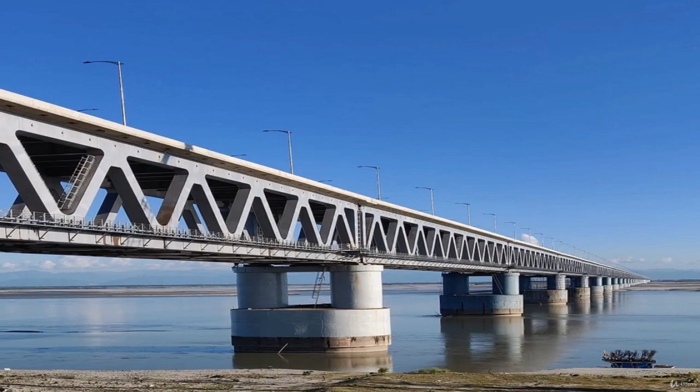In this episode, we'll take a look over the general information and the engineering aspects of Bogibeel Bridge, which is India's longest rail-cum-road bridge. So let's get started.

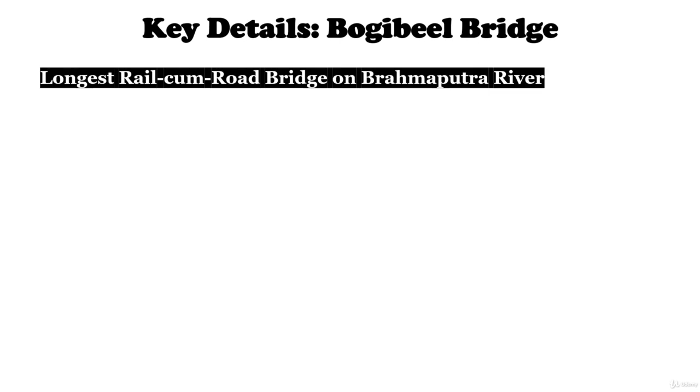Bogibeel Bridge is a combined road and rail bridge over the Brahmaputra River in the northeastern Indian state of Assam. This bridge is 4.98 km long, which reduces the travel distance for the people of Arunachal Pradesh and Assam. Before this bridge came into reality, people used to travel by ferry to cross the Brahmaputra River, and that transportation is slow and difficult too.

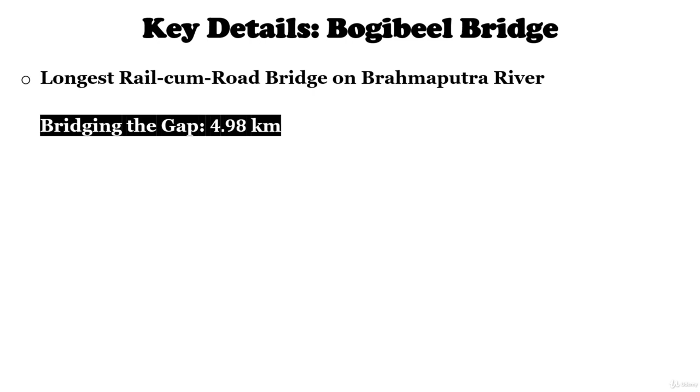Bogibeel Bridge is the fifth longest bridge in India after Bhupen Hazarika Setu, Dibang River Bridge, Mahatma Gandhi Setu, and Bandra Sea Link. But it is the longest rail-cum-road bridge in India and the second longest rail-cum-road bridge in Asia.

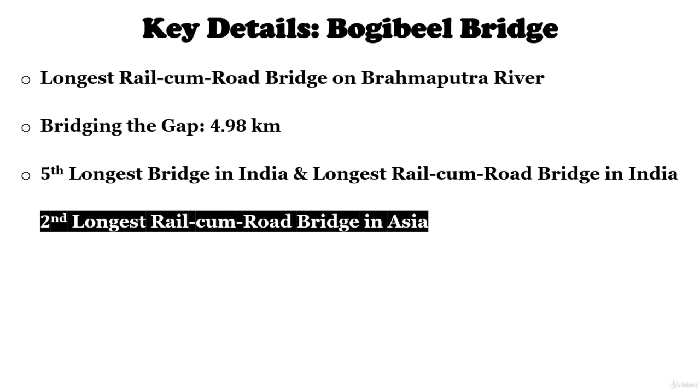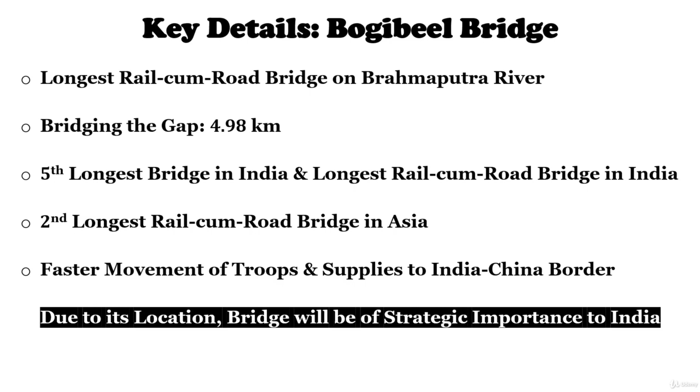This Bogibeel Bridge has strategic importance, which facilitates faster movement of troops to Arunachal Pradesh, the country's easternmost Indian state that shares a border with neighboring country China. The bridge gives easy and direct access to Upper Assam from the rest of the country through Brahmaputra's north bank, so due to its location, the bridge has a strategic importance to India.

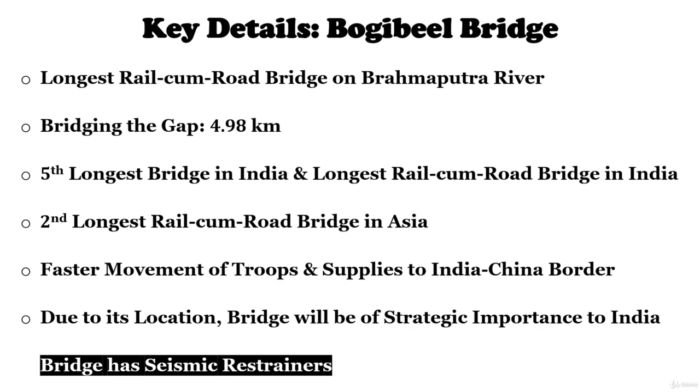The bridge is designed to withstand tremors up to 7 and beyond on the Richter scale. So to offer good stability to the heavy spans of Bogibeel Bridge, spans are provided with seismic restrainers. Bogibeel Bridge spans the Brahmaputra River and connects the town of Dibrugarh on the south side of the river to Dhemaji, on the north side of the river in the state of Assam.

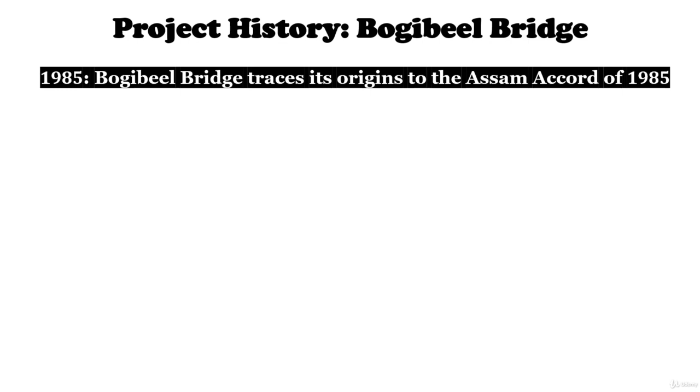Now let's take a look over the history of this project from its initiation to completion. The Bogibeel Bridge traces its origin from the Assam Accord of 1985. It was sanctioned by the Government of India in 1997 and 1998. The foundation stone of this bridge was laid in 1997 by then Prime Minister H.D. Deve Gowda. The construction, however, started only in 2002 when then Prime Minister, the late Atal Bihari Vajpayee, inaugurated the construction works.

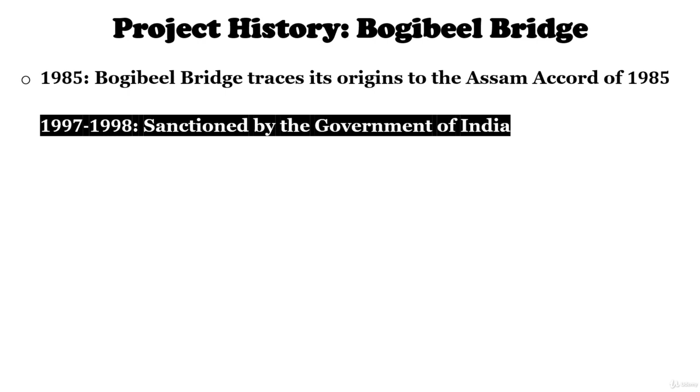However, the work did not begin until 2007 owing to the lack of funds and attention. Consequently, that same year, the Bogibeel Bridge was granted national project status by the Government of India in 2007 under the Prime Minister of that time, Dr. Manmohan Singh. Accordingly, the Union Ministry of Finance funded 75% of the project cost, while the Ministry of Railways financed the rest. The bridge witnessed huge time and cost overruns over time.

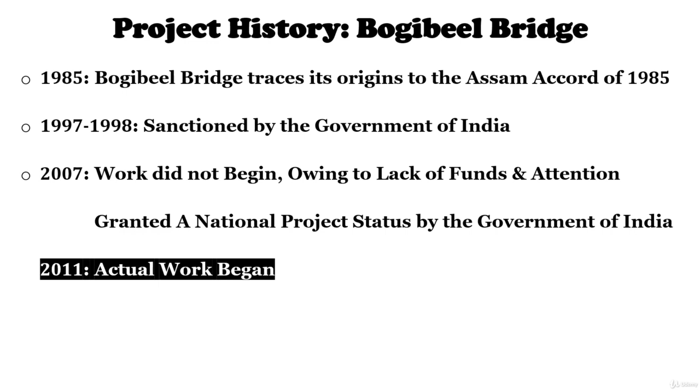The cost was initially estimated at Rs 1,767 crores, which escalated to Rs 4,996 crores by 2014, and the overall cost of the project ultimately escalated to Rs 5,960 crores. And before the end of 2018, in December, the whole construction was complete. On 2nd December 2018, the first freight train crossed the Bogibeel Bridge. And on 25th December 2018, the present Prime Minister Narendra Modi inaugurated this Bogibeel Bridge.

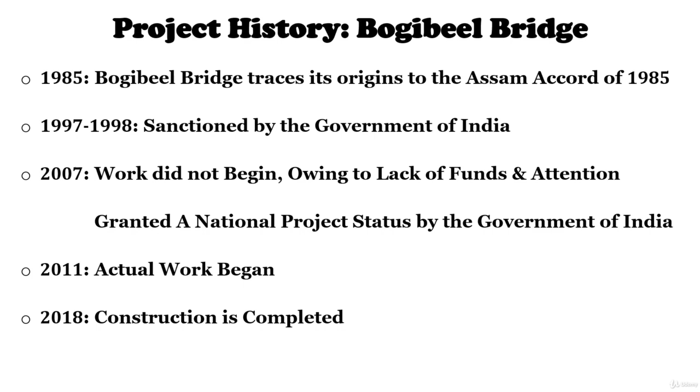Various contractors were involved in the construction of Bogibeel Bridge. The state-owned consultancy and project management enterprise RITES, Rail India Technical and Engineering Services, undertook the pre-construction studies, geotechnical investigations, and the detailed design of the railroad bridge. Bhartia Infra constructed the guide bunds and the approach embankments on the south bank of the river.

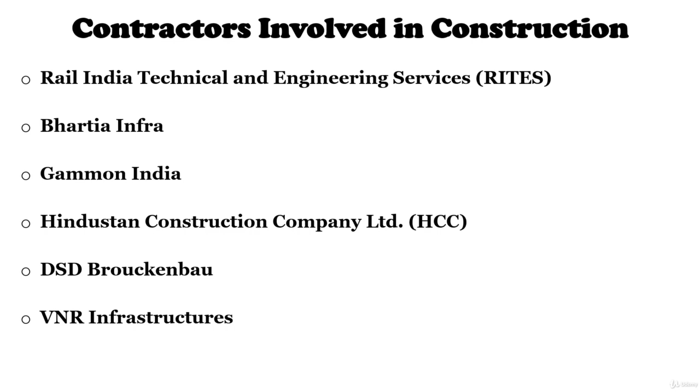The contract for the construction of the foundation and substructure of the bridge was awarded to Gammon India in April 2008. A joint venture of Hindustan Construction Company HCC, German-based DSD Brückenbau, and VNR Infrastructures was awarded the contract to construct the superstructure of the bridge in November 2011.

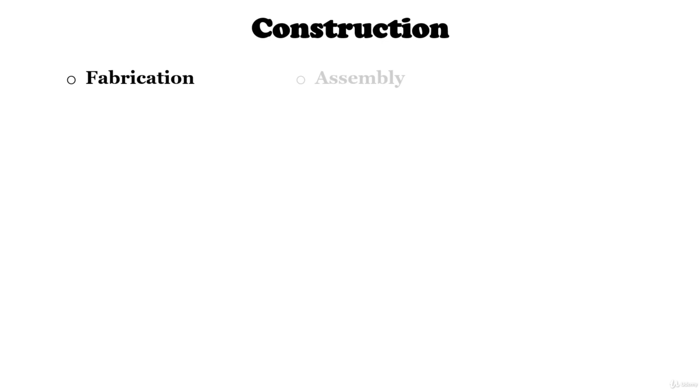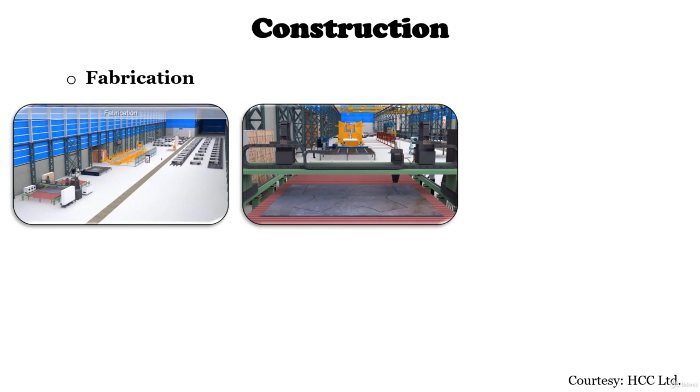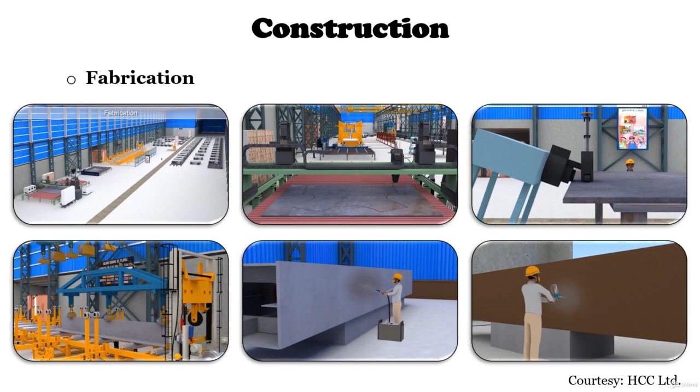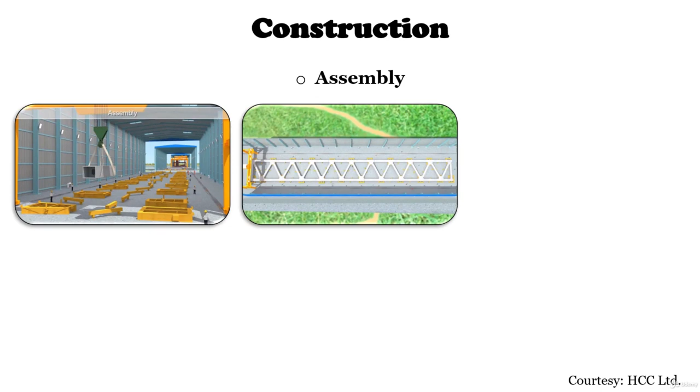As the bridge superstructure is a truss structure, different parts are fabricated which are joined together in the assembly yard to form a truss. Fabricated sections are then moved to the assembly shop, guided to their correct positions through jacking, and then welding is performed to assemble them. Then segments are sent to the vertical assembly. An examination of this is thoroughly made in the bridge dimension control chamber.

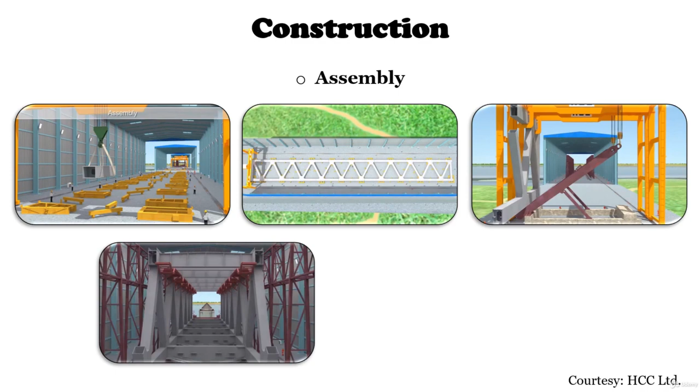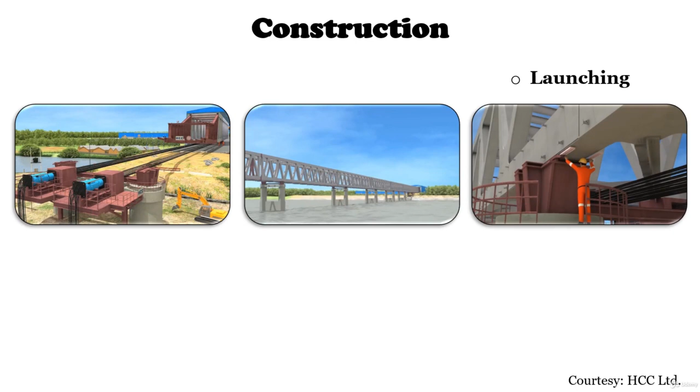After that, the launching nose is prepared. For launching, a 1000-ton jack linked with the substructure is used to move the steel truss over the pillars. The truss slides over the launching bearings with the help of sliding plates. At the same time, 10 spans are moved by the launching, and finally, the launching bearings are replaced by the final bearings.

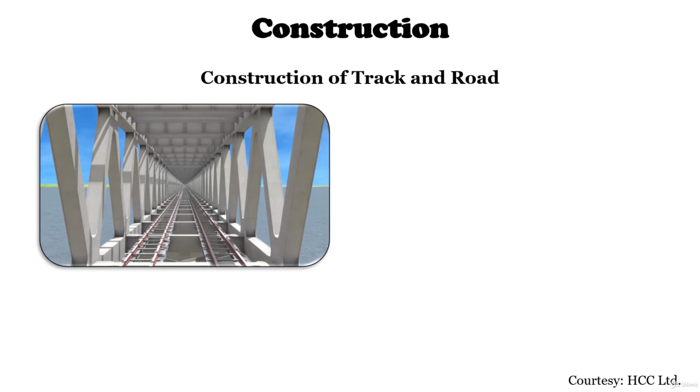Afterwards, tracks for the railways are laid and roads are constructed over the truss by adopting RCC construction. Now we'll see the measures taken to protect the structure from corrosion.

The superstructure of the Bogibeel bridge has been constructed using special graded copper bearing steel plates to reduce the corrosion. To further reduce the corrosion due to the excessive humidity, a complex corrosion protection system specific to the different components of the bridge has been implemented during the construction of this bridge.

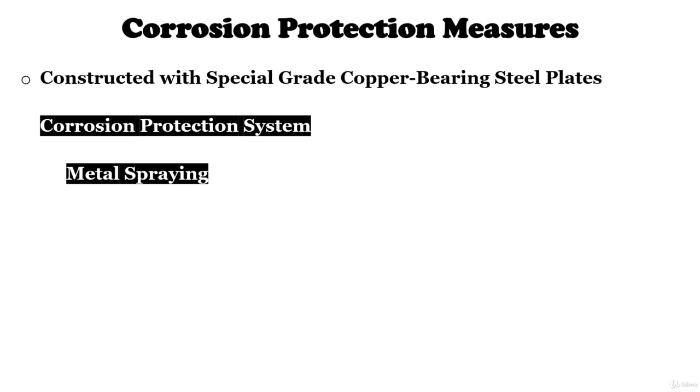Metal spraying by aluminium, in which the metal is melted and directly sprayed onto the surface of another metal to protect against the corrosion, heat, traction, etc. This method was used for the gusset plates and brackets. Hot dip galvanizing is also applied. In this process, iron and steel are coated with zinc, which alloys with the surface of the base metal.

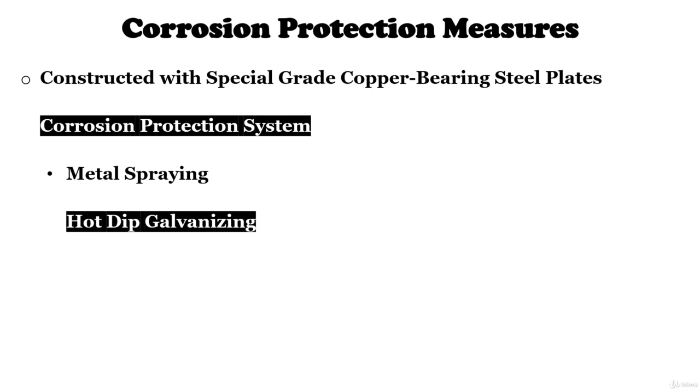Also, all enclosed spaces were sealed by welding and were vacuum tested so that no air can go inside and initiate corrosion. The location of Bogibeel Bridge falls in seismic zone 5 as per the latest Indian standard IS 1893 Part 1 2016, which has been most vulnerable to earthquakes with magnitude in excess of 7 on the Richter scale.

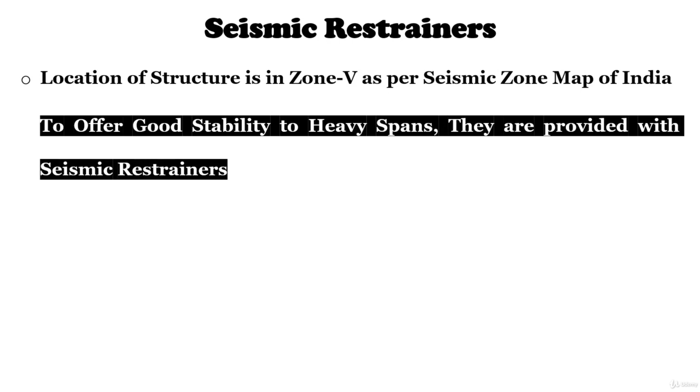So, in order to offer good stability to the heavy spans of the Bogibeel Bridge, they are provided with seismic restrainers. This arrangement works as a male and female connection, with female pockets embedded onto the piers and male parts arranged on the span.

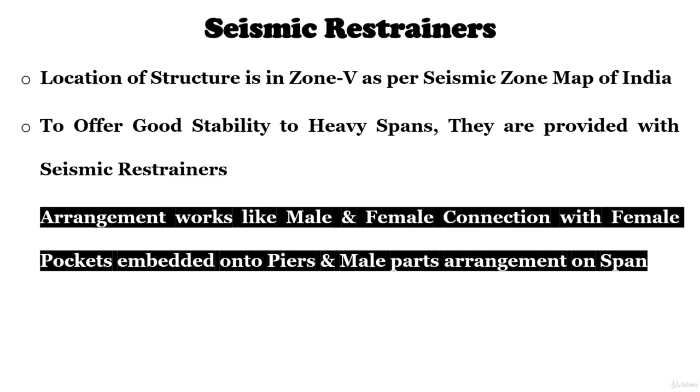Now let's see the overall benefits of this project. The bridge will be a big boost for the defense forces, as it can provide rapid connectivity to the areas near the India-China border. This means quicker movement of troops and heavy weapons. The biggest benefit is the time that it is going to save.

Other than this route, going from Arunachal Pradesh to Assam's Dibrugarh requires a 500 km detour via Guwahati. Now the journey is reduced to less than 100 kilometers. Also, the train between Delhi and Dibrugarh will come down from 37 hours via Guwahati to 34 hours. That is a reduction of 3 hours.

The bridge provides direct access to the districts of Upper Assam from the rest of the country through the north bank of the Brahmaputra river and will do away with the need to take the tortuous route through Guwahati on the south bank. Tourist places of Arunachal Pradesh now become more accessible, giving a fillip to the tourism industry.

Dibrugarh district also houses the prestigious Assam Medical College. The bridge will benefit interstate transportation of medical patients seeking treatment in Dibrugarh. Previously, if any super specialty emergency arose along the north bank of the Brahmaputra, the patient needed to rely on a boat ferry for transportation, which can be very cumbersome or dicey.

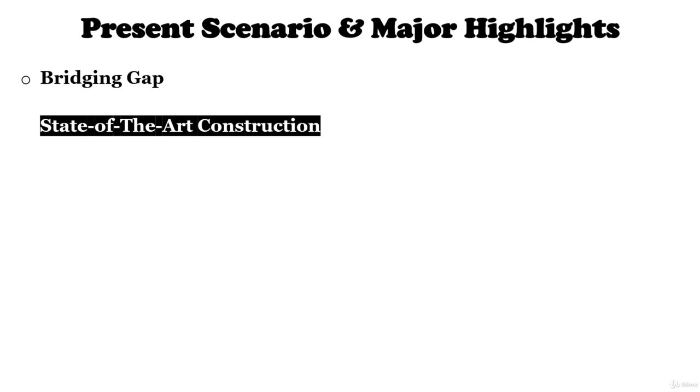It is the country's only bridge to have fully welded steel concrete composite girders. It will enhance the national security of the eastern region of India by facilitating the swift movement of defense forces. It will also provide a shorter distance and alternative railway route to Dibrugarh via the north bank of the Brahmaputra.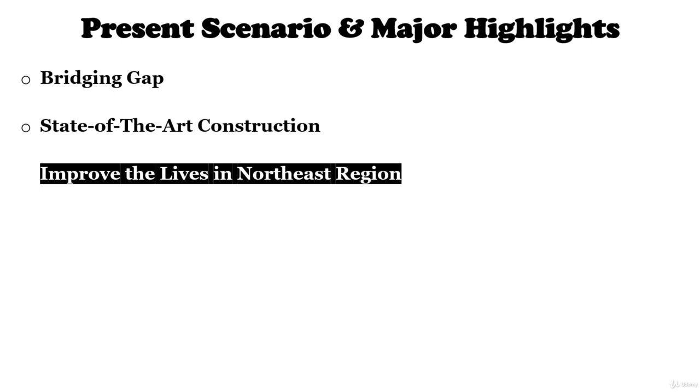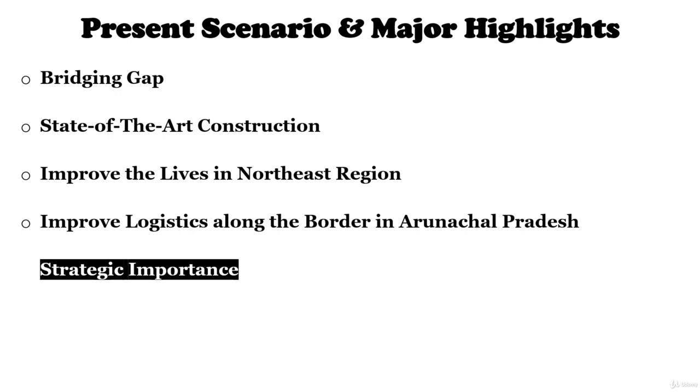The bridge is a part of infrastructure projects planned by India to improve logistics along the border in Arunachal Pradesh. Due to its location, the bridge will be of strategic importance to India, as it will significantly enhance India's ability to transport troops and supplies to its border in Arunachal Pradesh.

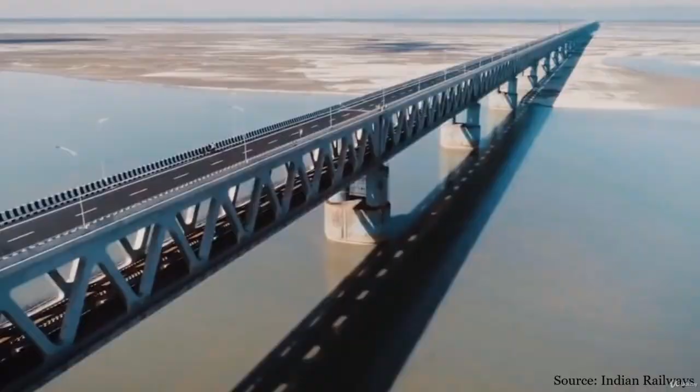The Bogibeel Railroad Bridge significantly reduces unnecessary extra cost of transportation and time through the railway as well as the roadway.